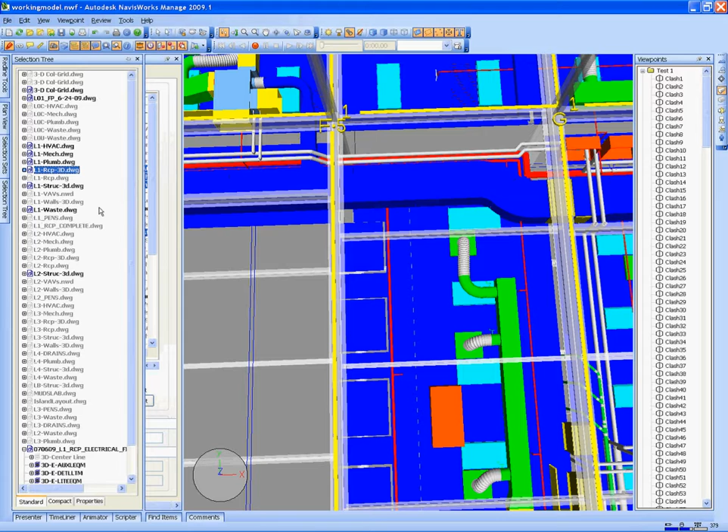But it's kind of hard to see. Let me highlight the reflected ceiling. See that? It's like a magenta colored ceiling or pink. Yes, that's a 12-foot ceiling, and that's only how wide it is.

Exactly. What we would have to do is shift that light down. Let's check this RFI off. If we could switch out, okay, you see where that supply air vent is next to the light?

Go back up there. Here. Yeah, go back up. Where that duct is. Yeah. If we could switch - what if that moves south? Yeah, if we switch that light with the supply air, then that would solve that.

Right. You move 2 feet north with your supply air diffuser, and then move the lights south 2 feet, right? Correct. But the whole line would have to move, I would think, for it to look symmetrical.

It's all aesthetics, man. Yeah, it is. Oh boy, they're going to have a... The architectural part of these buildings pretty much drives. So you're right, it does. And so this will be a good little task for the engineer to figure out for us, right?

Well, okay. One thing we could do is move that light down 2 feet and the one on the other end up 2 feet. So it's just the lights on the ends could move in. That way the ones in the center stay where they are.

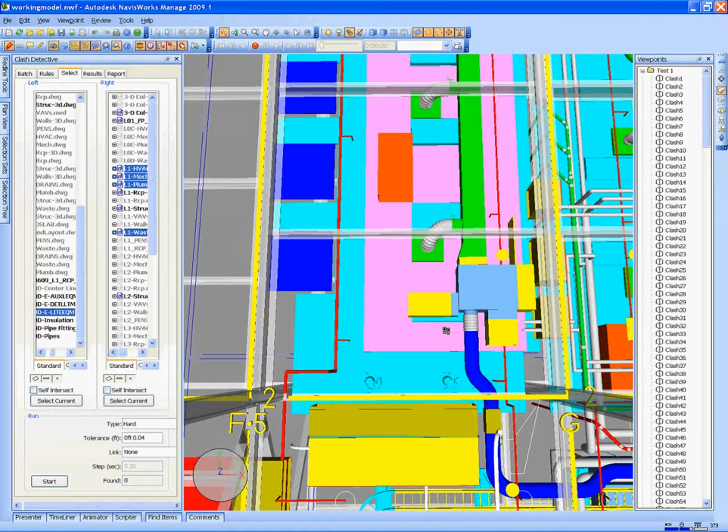It would make it look symmetrical. It would make it look even, but yes. We can suggest that. I'll make a snapshot of this.

Okay. Like I say, when I write the RFI, we'll send it in, and I'll copy you, Greg, and Paris, and we'll see if we can get a turnaround, see if we can get this level complete.

Because I know we're going to come up with some of these issues because of these 12-foot ceilings. Right. Absolutely. All they do is hose everything. It's a freaking pipe dream as far as I'm concerned.

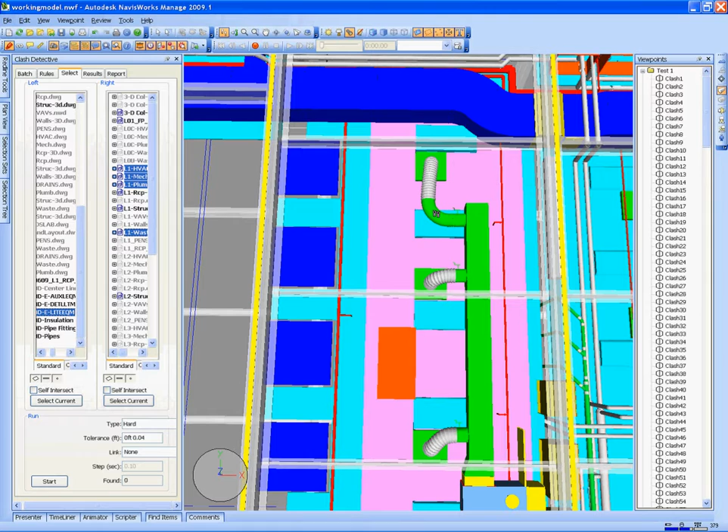Okay, so anyway, I wanted to go over those. See, this is another all thread. Another all thread right through the duct. But we know what we're doing there.

Yep. We're splitting the model in two. That's a hanging light, and I'm not gonna - that's a hanging light that's right over the unit. We know that's not going to happen. Let's move on. We know.

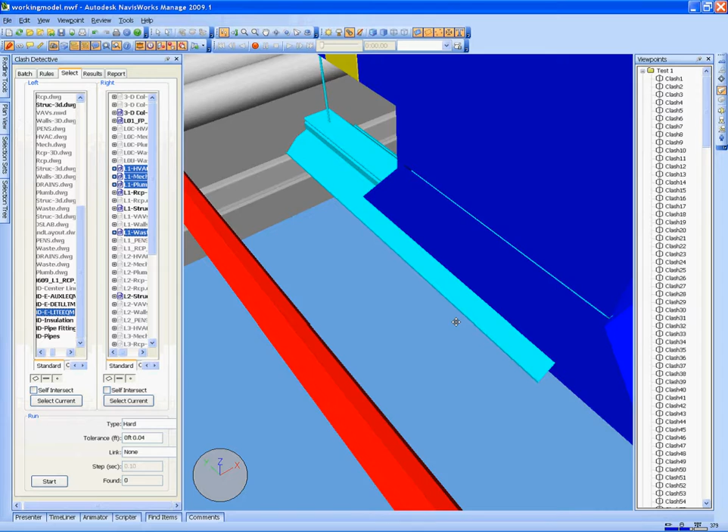Yeah. We know. Okay. Let's just remove that one. That's another all thread. I can see it right there. Okay. That's what I mean. It's kind of...

Little. These are field issues. They're gonna work out. But it would be nice to have these on a different layer. I could freeze them and go through the rest of them. He's gonna do that. Yeah.

And I'll have it done tomorrow. Yeah, Jeff, I'll give you a call as soon as the upload is made. Cool. This is kind of pointless to go over these right now, is what I'm getting.

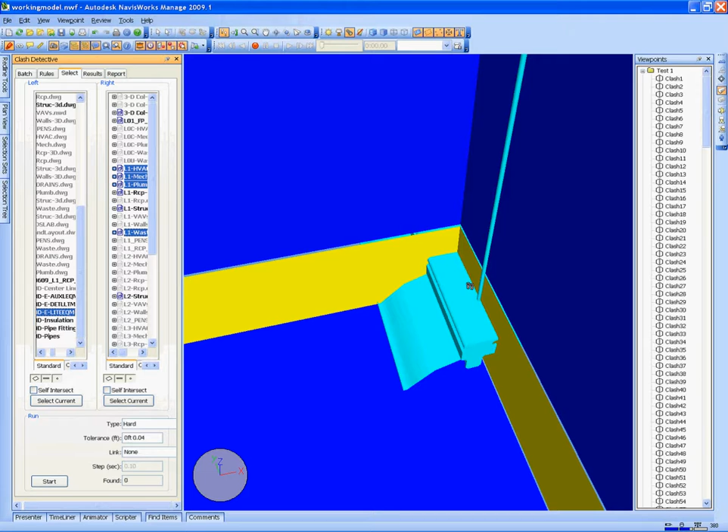Sure. I agree. I'm ready to cut this meeting loose, and we'll get on. We'll look at the big ticket items on level 2 tomorrow. Now, there are just a few feeders on this first floor, but I didn't see any issue with those.